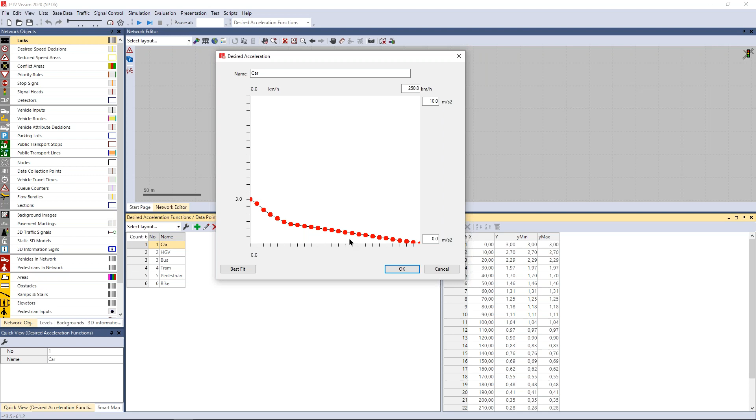Of course, you can have some spread there, but a little bit smaller than for conventional vehicles, or any which fit your assumptions. And you can see there are many other functions you can have a look at.

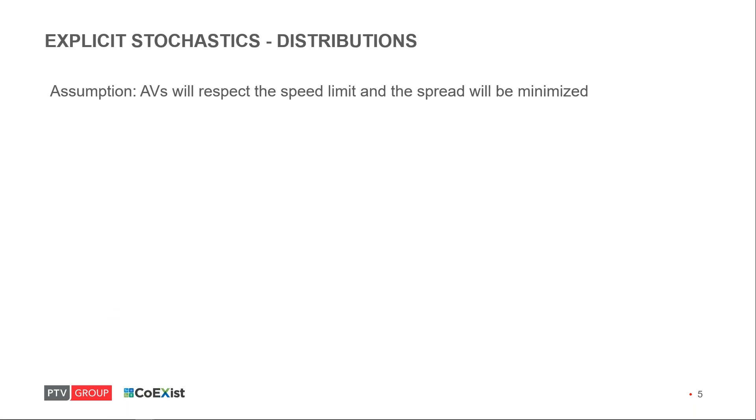So the second typical place to set explicit stochastic in Vissim are distributions, and the most important distributions are the desired speed and the time. That has an impact on headways with the Wiedemann 99 model, for example. And for example, for desired speed, we can assume that the speed spread of AVs will be much smaller and they will obey the speed limits, which many human drivers do not do, as we know.

So again, if this is the original speed distribution, then your assumptions can say that automated vehicles will follow the rules and they will drive 100 kilometers on a road where the limit is 100, with much less spread.

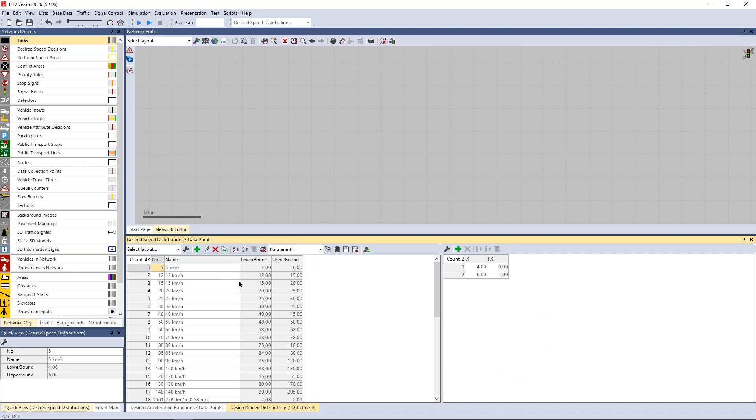So if I switch back to Vissim and I go to base data, distributions, desired speed. So if you have this default distribution for speed 130 and you want to create your own, then you can just duplicate this one, then open it, and you can put here a new range which fits your assumptions, and you can also add your points there if needed.

So that was about explicit stochastic, about functions and distributions. You can access them in Vissim, you can duplicate and change them, and use your own assumptions. Now let's have a look at the new features.

At first, a few words about the role of driving logic. It's the logic in the form of algorithms which decide how the autonomous vehicle will behave. And this has an implication on following behavior, lane change behavior, lateral behavior, reaction to signals, and conflict resolution. And for each of these parts in Vissim, you have a set of parameters you can set.

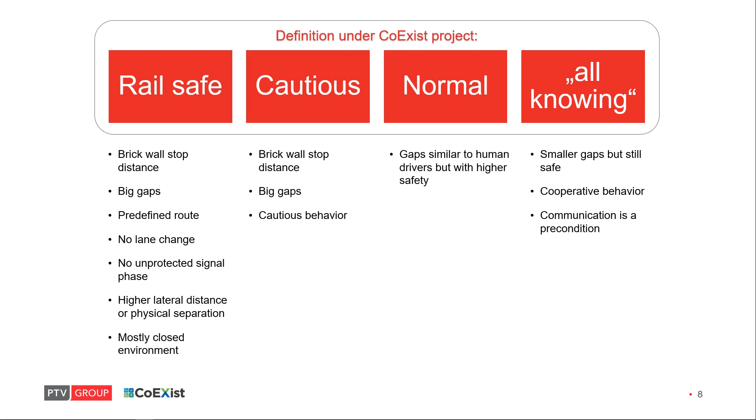Then there is cautious, which follows the brick wall stop distance concept. We expect bigger gaps than by human drivers, which means very cautious behavior. Then the normal one, where the behavior should be similar to human behavior in terms of gaps and distances to other vehicles when following, when interacting. And all-knowing, where we can assume also smaller gaps, but still high safety and cooperative behavior, and where communication is a precondition.

The first feature, enforce absolute braking distance. The idea behind this: the vehicle can stop safely anytime without a crash, even if the leading vehicle stops instantly, which means turns into a brick wall. And this has implications for following behavior. So the vehicle keeps a distance which is the braking distance needed at the speed plus standstill distance, but it also has implications on lane change behavior,

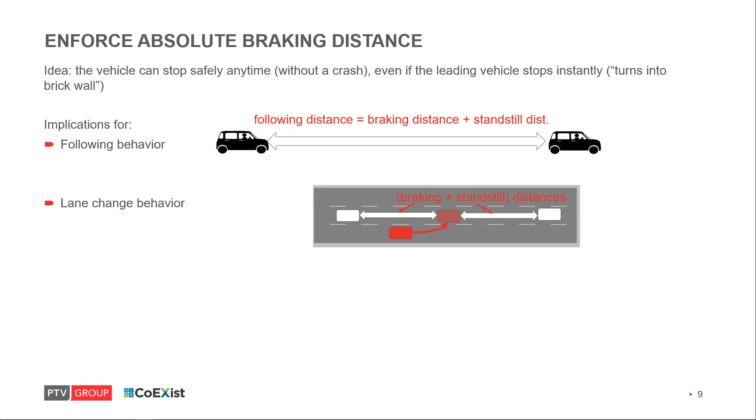where if a vehicle wants to perform a lane change into a lane where other vehicles are present, then the distances in front of the vehicle and behind the vehicle need to be big enough, and that reflects the braking distance and standstill distance. And it also has an impact on gap acceptance at intersections, but only for conflict areas. It doesn't work with priority rules. And here, the rear gap equals the time to brake to a full stop 1 meter in front of the conflict area.

I will switch to Vissim now. And please, if you didn't start Vissim until now, please do it now. Start Vissim.

And in the directory EABD examples, so let's have a look at the examples. There is a directory EABD examples, and from this directory, I will load the EABD link example into Vissim. Then start a simulation.

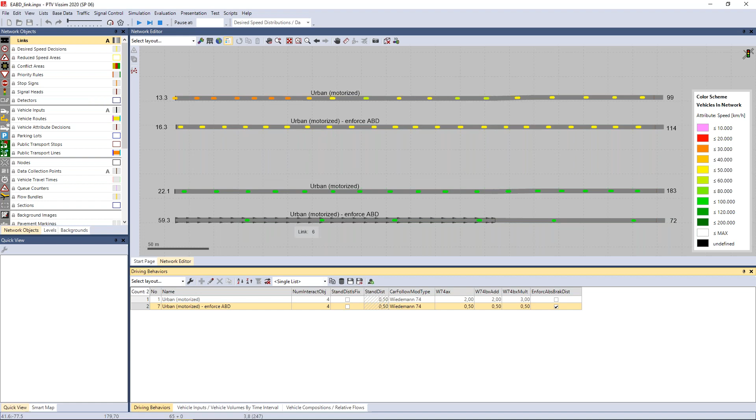But here the difference to the first one is not so big because the speed is quite low. The desired speed is just 50 kilometers. But if you have a higher desired speed in the network, then you can see that the distances are much bigger. That's because the vehicle needs much more space to brake to come to a full stop in any situation. So in a theoretical situation, this leading vehicle would turn into a brick wall instantly without its own braking distance.

And this principle, these options here use absolute braking distance. This is used by the first two driving behaviors or driving logics we worked with in the CoEXist project, Rail Safe and Cautious.

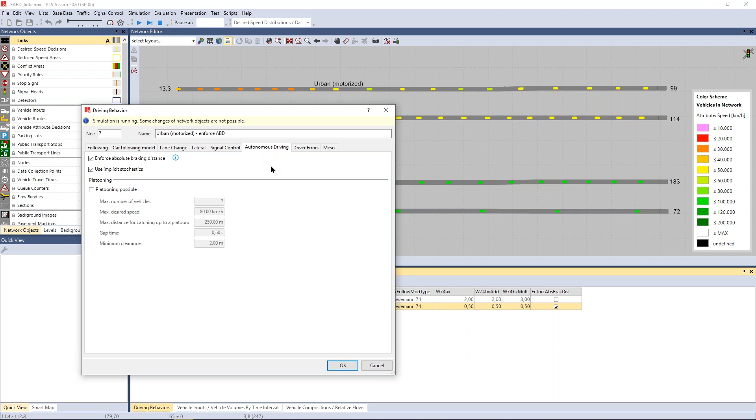Okay, then let's have a look at the second example, which you can find in the same directory, EABD examples. And it's EABD intersection. I need to stop the simulation first. And then I can load this one. I start a simulation.

And you can see two pairs of networks. On the left side, that is a low speed environment. And on the right side, it's a high speed environment. And you have one major flow and one minor flow with a conflict area here, which means the vehicles in the minor flow need to wait for a gap in the major flow to cross the intersection.

It's the same situation in each network here, but here the default driving behavior is used, urban, but here a modified driving behavior is used where enforce absolute braking distance is activated. Yeah, the same here. This is the default one, and this is with enforce braking distance activated. And what is the impact of this?

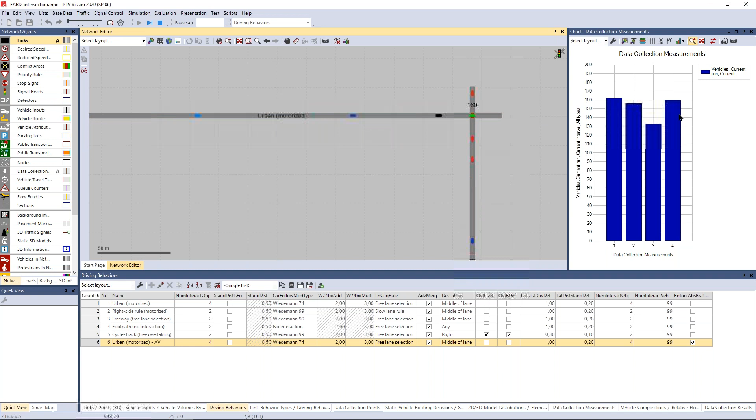And you can see that when you activate enforce absolute braking distance here, then you will get a lower number of vehicles going through the intersection. The number is collected here, at collection point number 3, which is bar number 3 in the diagram. And the number here, 160, is connected with collection point number 4, which is number 4 here in the diagram. So this is number 3, this is number 4, this is number 2, and this is number 1.

So you can see it has an impact on the capacity of this simple intersection, because if you activate enforce absolute braking distance in that case, and especially in a high-speed environment, the vehicles need bigger gaps in the major flow to cross the intersection.

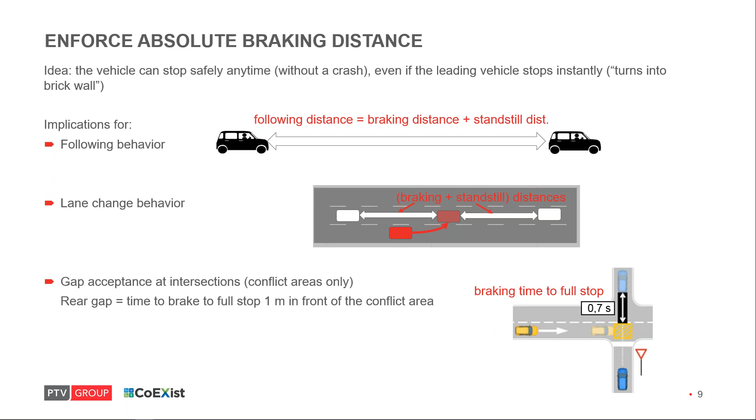Okay, let's go back to the presentation. The next feature is number of interaction vehicles. This was available in Vissim 10. In Vissim 10, we call that number of observed vehicles.

Some network objects are modeled as vehicles in Vissim, and vehicles treat these network objects as a preceding vehicle, and that is for red signal heads, reduced speed areas, and priority rules. And vehicles also treat some network objects as preceding vehicle if they have to stop. That applies for stop signs, public transport stops, and parking lots.

And since Vissim 11, instead of one parameter number of observed vehicles, we have 2 of them. We have number of interaction objects and number of interaction vehicles. Why? The idea behind it is that automated vehicle can see the signals ahead, but only 1 or 2 vehicles in front of itself, because the sensor cannot see through the leading vehicles.

And if you have the settings in Vissim that the number of objects is smaller than the number of vehicles, that will be the same behavior as in Vissim 10. But if the number of objects equals or is higher than the number of vehicles, then you will get some new limited sight and interaction behavior. So you can distinguish between interaction vehicles and objects with these 2 parameters now.

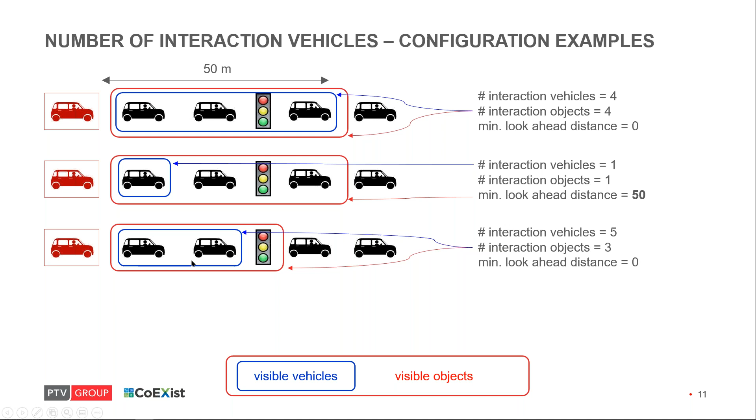And other settings: interaction vehicles 5, objects 3, and minimum look ahead is 0. So 3 objects are visible, and all vehicles up to 5 within this range can be seen. So in this case, these 2 vehicles. Another situation: number of interaction objects 5, interaction vehicles 3. So the first 3 vehicles within interaction objects are visible, and all maximum 5 interaction objects are visible. So this signal head is visible, so the vehicle can react on it.

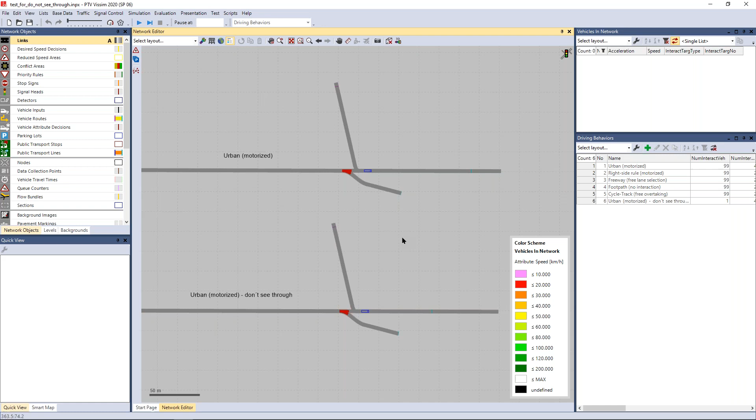Okay, I will switch to Vissim now to show some examples. I go to the directory number of interaction vehicles, and there is an example test for do not see through. So load this example into Vissim. And here you can see 2 identical networks, but with different driving behavior in use.

And when I start the simulation with F5, and then I pause the simulation with F6 to see how it is at the beginning of the simulation. There are 2 vehicles coming in to the network here, and 1 vehicle coming from the north, and this 1 vehicle will park here in this parking lot, and that will simulate a situation when a vehicle is broken, for example, and cannot continue, or there's a crash.

So when I continue with the simulation step by step by pressing F6, I see that this vehicle will park here, and the same situation here in the second network. And now these 2 vehicles will continue on their routes, where this first vehicle, number 3, will turn right, and the second vehicle, 5, will continue straight.

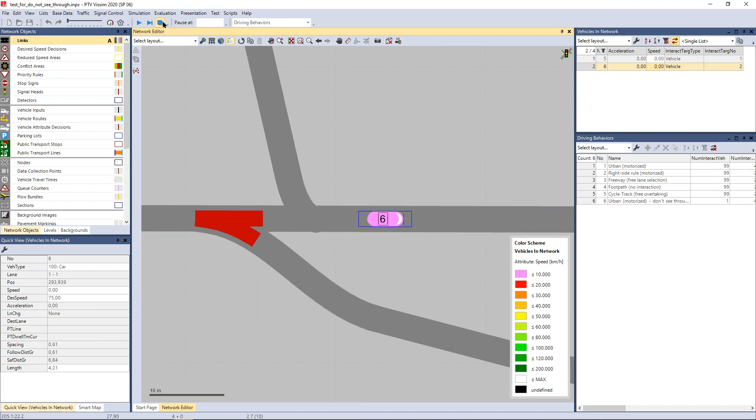So I will continue step by step with this simulation. So number 3 will turn right, and number 5 is approaching number 1 and can stop safely here. When I have a look here down, I have a different picture. There is a crash. So I will stop the simulation and

simulate again, step by step, by pressing F6, and have a look on the vehicle number 6 and on the interaction target number. It's 4. And now I press F6 to go one time step further, and it's still number 4 here as interaction objects. One more, one more, and I will press F6 until I get a different interaction target number here. One more, one more,

one more. Now this is the moment that this vehicle number 6 can see vehicle number 2, is interacting with vehicle number 2, but the distance to this vehicle is too small to stop safely with the speed of this vehicle, what we can see. So there is a crash because the vehicle couldn't see the standing vehicle on time.

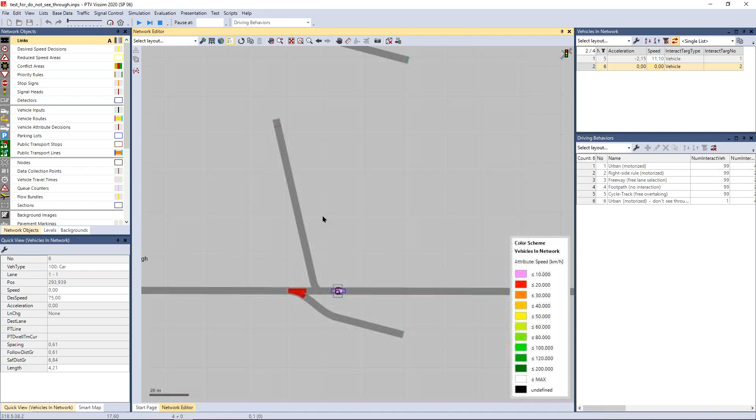So this is a demonstration of what you can achieve with the limitation of how many vehicles can be seen, or with how many vehicles your automated vehicle can interact with. And on the slides, I was talking also about minimum look ahead distance. So I will say a few words to that one. But have a look on the settings in driving behavior at first.

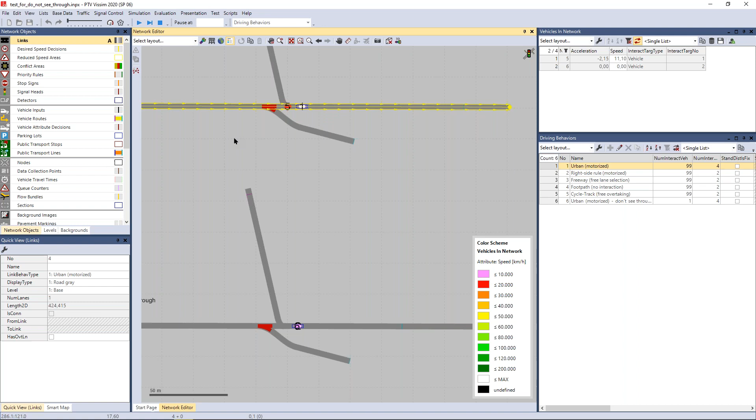So on this link, link number 1, link behavior type 6, it is using driving behavior number 6 here, and the number of interaction vehicles is set to 1. Whereas here on urban, this link is using link behavior type 1, and link behavior type 1 is using driving behavior number 1, where number of interaction objects is 4 and number of interaction vehicles is 99. So all vehicles within the number of objects can be visible. So the two vehicles in front can be seen, and the vehicle can stop safely.

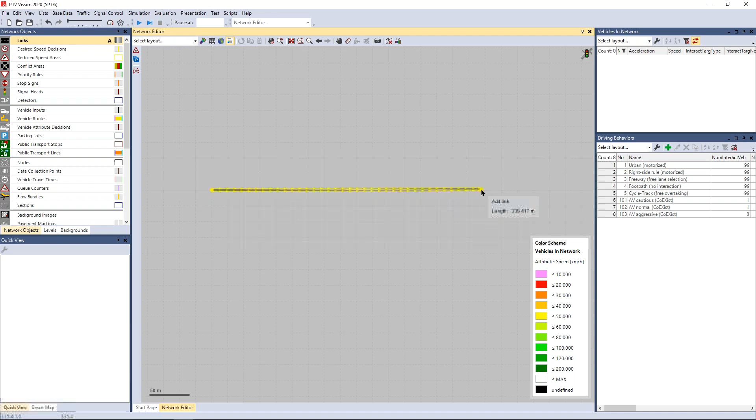We can do one more example. So I will stop the simulation, and now I will create a new model from scratch. And please do all these steps with me. It will be not complicated, just a very simple network with one link. And we will create a situation where we have non-lane based traffic. So we have one wide road. Let's say the width is 15.

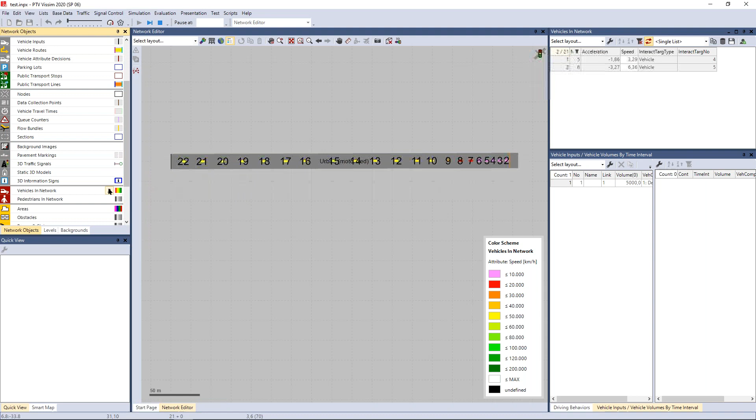And put a vehicle input here on this link, with some high volume. I will put here 5,000. And one more thing, I want to stop the vehicles before they leave the network. So I will place a stop sign here at the end of the link. So I will save the model. I will switch off the labels for vehicles. So this is how it looks like. So we will do some changes.

The driving behavior here, which is used, is urban motorized, or that's the link behavior type. And I need to have a look into the link behavior types list. And this urban number 1 is using driving behavior number 1 urban. So I switch to driving behaviors number 1, and I will open it and do some changes. And on the tab for lateral, I will allow any position, and I will allow overtaking on the same lane from left and from right.

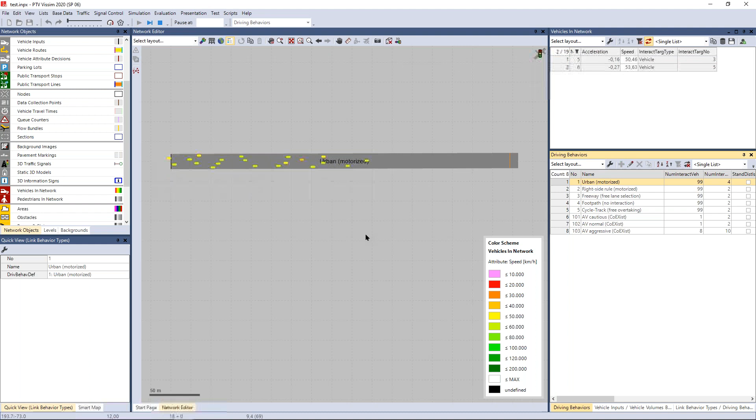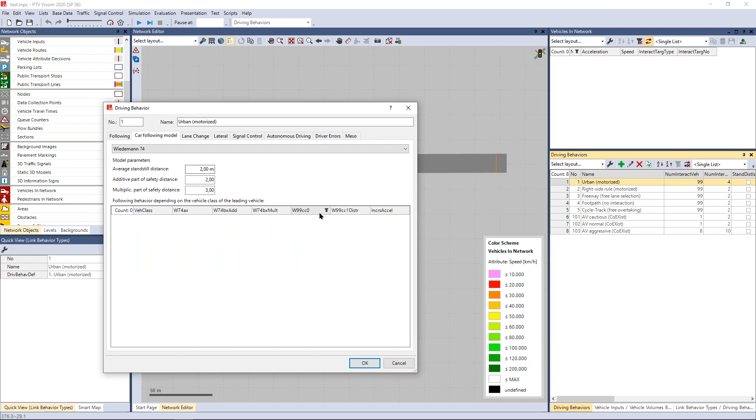So this is how it looks like. It's quite a mess. Just switch to 3D to see it clearly. So the vehicles are crashing into other vehicles. Why is that? Let's have a look into the driving behavior, urban, which is used. And let's have a look on the tab following. So the number of interaction objects is set to 4.

So only 4 vehicles in front can be seen, but in a situation that there is non-lane based traffic, it can easily happen that there are much more objects in front of you. You need to observe and react on that. It's typical for bicycles, for example, but also for non-lane based traffic. So now I could increase the number of interaction objects to solve the issue, or I can say that there is some minimum look ahead distance.

I will say 30 meters, which means that all objects which are visible, which are within these 30 meters, can be seen, and the vehicles should react accordingly. So I don't have crashes anymore, because the vehicles can react to all objects they should react on in the front, and there are no crashes anymore.

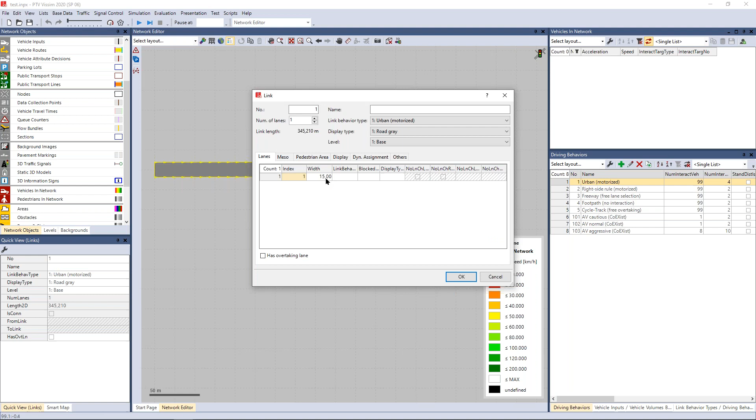So a quick recap of what I did. I created one link with one lane, but I set the width to 15 and inserted here a vehicle input with a high volume, and the driving behavior used on this link, I modified it. So when you double click on that driving behavior number 1, it opens the dialog for driving behavior.

And here you have the tab lateral, where I changed the desired position at free flow to any. And I activated here overtaking on same lane from left and from right. And you also can specify the lateral distances which should be kept. And after changing to these settings, I got a lot of crashes there, and I resolved that by setting the minimum look ahead distance to 30 meters.

So all objects within this distance can be seen and the vehicle can react accordingly. So the vehicles can see up to 99 vehicles up front.

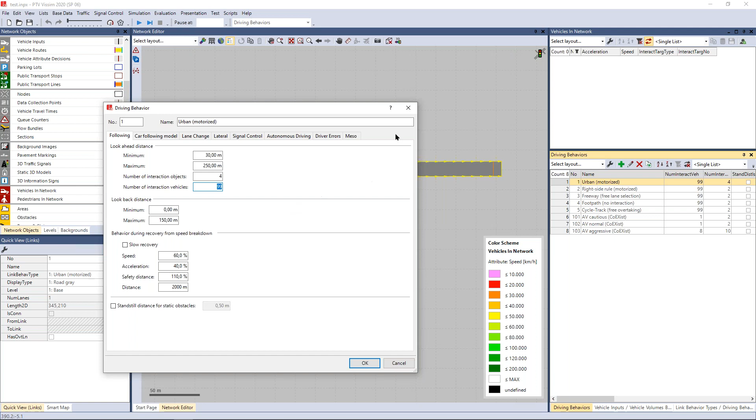And to stop the flow, I insert a stop sign here at the end of the link. So each vehicle needs to stop and then it can continue.

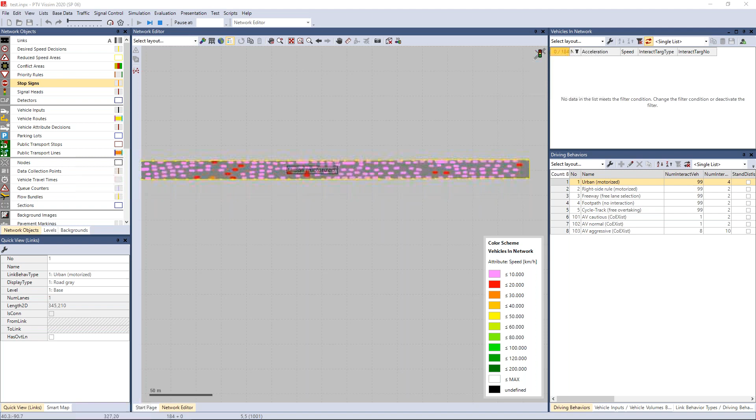What I did in the last example in Vissim, I set the minimum look ahead distance to a non-zero value, to 30 meters in my case, which means that all vehicles within this distance, up to the number of interaction vehicles, which was 99 in my case, can be seen and the vehicle can react on it accordingly.

And after our workshop, I will provide you also this presentation so you can have a look afterwards again. I see there are some other questions. Maybe I will come to those questions later after my presentation.

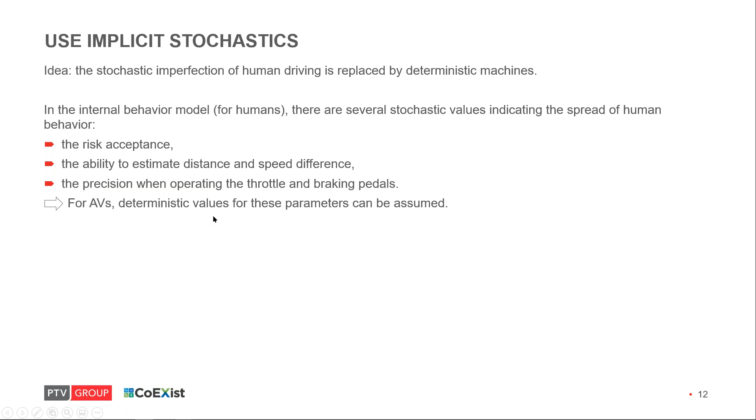So the next one, use implicit stochastic. The idea behind it is that the stochastic imperfection of human driving is replaced by deterministic machines. And in the internal behavior model, which was developed for humans, there are several stochastic values indicating the spread of human behavior: the risk acceptance, the ability to estimate distance and speed difference, the precision when operating the throttle and braking pedals, and for AVs, deterministic values for these parameters can be assumed.

So if the attribute use implicit stochastic is false, a deterministic average value is used instead of such a stochastically distributed value whenever the distribution cannot be set by the Vissim user. And this option affects desired safety distance, desired acceleration, desired deceleration, and decision points, so when to start braking and accelerating. And for these three, the user may also specify distribution functions, but these are not adjusted automatically. Only an implicit term is suppressed.

So I will switch to Vissim again and let's have a look on another example. There is the directory use implicit stochastic, and there is one example inside. So open this example.

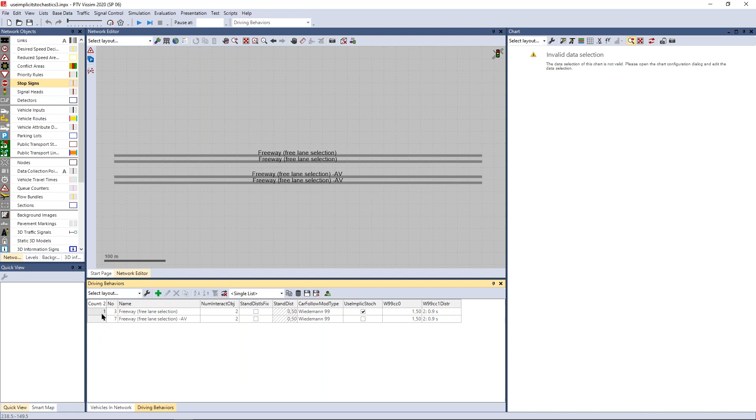Okay, in this example, I'm using two driving behaviors here, the default one and a modified one. And in this one, which is modified, on the tab for automated driving, the option use implicit stochastic is deactivated, because by default this option is activated. And I will start the simulation now and stop, and will explain what this is about.

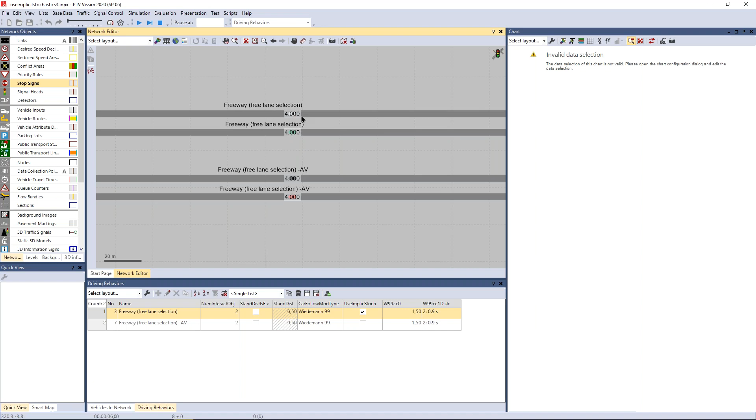I have here 4 links. Here, the default driving behavior is used for the first 2, and for the second pair of links, the modified driving behavior is used. I have here vehicles in the front with the same speed of 10 kilometers per hour, so they are at exactly the same position. And I have other vehicles which drive with higher speed and will approach these vehicles here.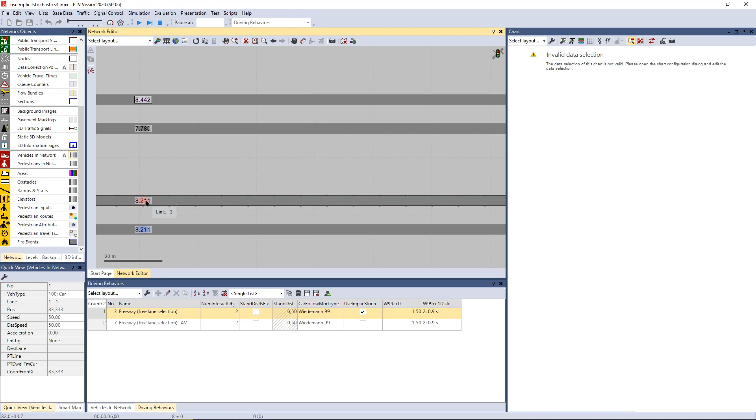And the labels for vehicles here are showing me the safety distance gross value. And you can see that here these 2 vehicles have identical speed. They have been inserted at the same moment in the network, but they have different values here. And these 2 vehicles here have identical values.

And when I continue simulating this, the vehicles will approach the vehicles in front, and now they follow the leading vehicle. And you can see that this value and this value differ. They are changing, there is some oscillation, but they are different.

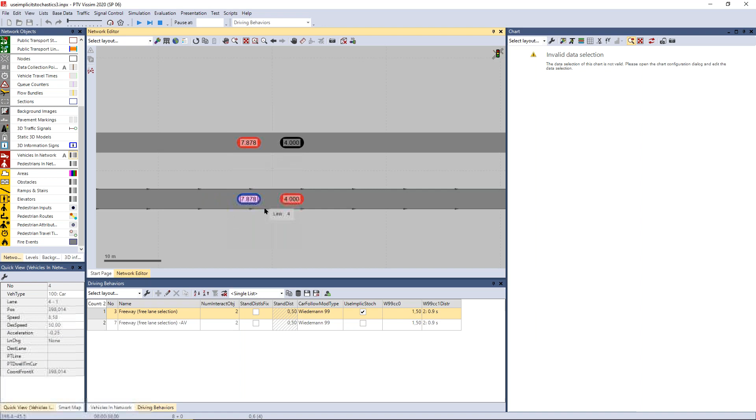And here, for the second pair of links where the driving behavior has been modified, you can see that the value is the same. It's always changing, but it's always the same. And that's because the implicit stochastic is switched off here.

You can see it also in the chart, but you probably need to select the layout here to show the values. And when you continue the simulation, you see how the values are changing, and this one and this one are identical, and this one and this one are not identical. Okay, I go back to the presentation.

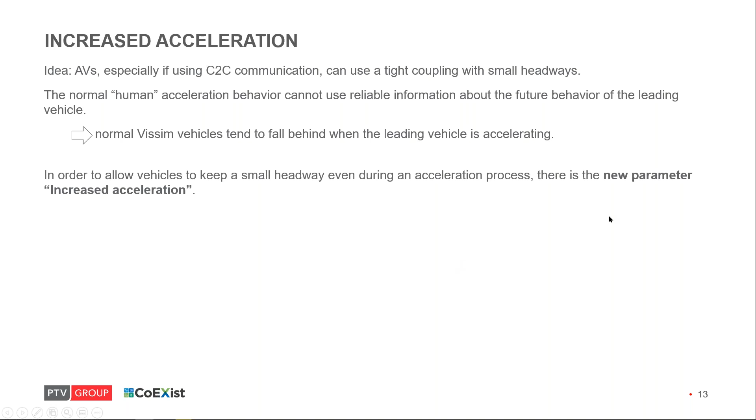The next one we implemented is increased acceleration. And the idea here is AVs, especially if using car-to-car communication, can use a tight coupling with small headways. And the normal human acceleration behavior cannot use reliable information about the future behavior of the leading vehicle. So normal Vissim vehicles tend to fall behind when the leading vehicle is accelerating. And in order to allow vehicles to keep small headways, even during the acceleration process, there is a new parameter, increased acceleration.

So in the list of driving behaviors or in the dialog, you can set this value, increased acceleration, which defines a percentage of normal acceleration to be used when the leading vehicle is accelerating. The vehicle cannot exceed its maximum acceleration. That's a limitation. But it can exceed its desired acceleration.

So when I switch back to Vissim to have a look on this, when I open some driving behavior, then on the tab for car following model, here in this field, I need to stop the simulation.

You can put some value which is higher than 100, which means increased acceleration. So a vehicle which is using this driving behavior following a vehicle of this class can use this increased acceleration.

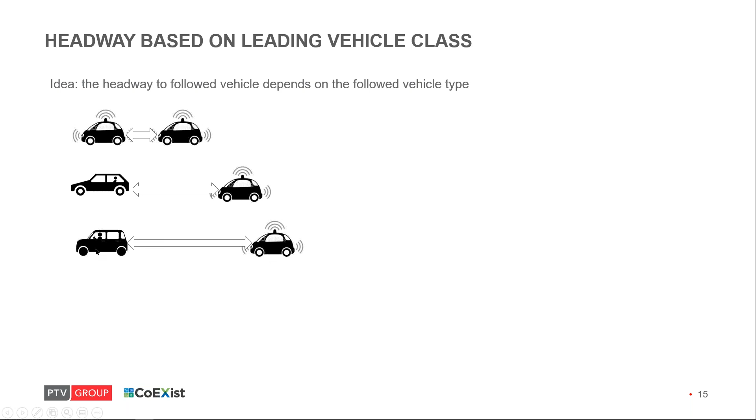Headway based on leading vehicle class. What is this about? The idea here is that the headway to the followed vehicle depends on the followed vehicle type or vehicle class. So you can have very small distance between automated vehicles which are connected, a little bit higher between automated vehicles without connection, and even higher distance when an automated vehicle is following conventional vehicles with a human driver.

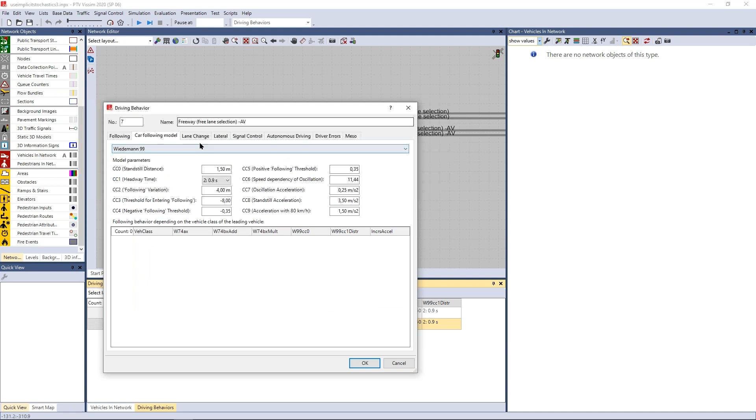And you can set this in the same dialog I showed you where I set the increased acceleration and also in the list of driving behaviors. So let me switch to Vissim and I will open some driving behavior just to show you where you can set these values. For Wiedemann 99, you can set CC0 and CC1 and increased acceleration based on the class of the leading vehicle. And you can insert here as many lines as you need and set the appropriate value here.

And here maybe we could do a simple exercise. So I will create a new model. I will also open the default layout. So I clicked on File. At first I clicked on New File, and then I chose from File, Open Default Layout. Maybe you will see this one, and you need to switch to Network Editor, but my default network always shows the Network Editor because I saved this setting, like you can see right now, as my default with save as default.

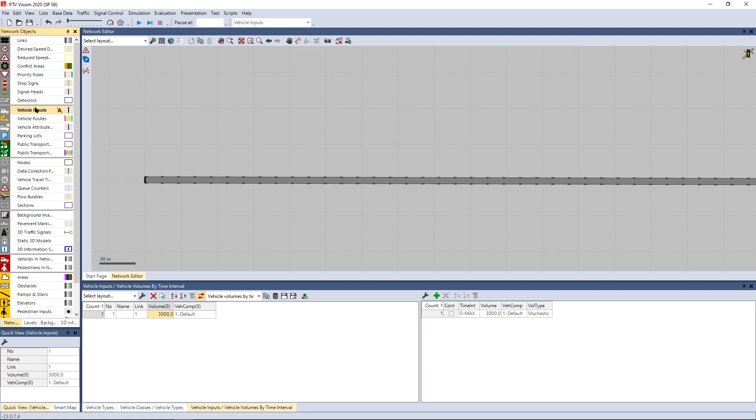And here, let's say I want to have 50% conventional cars and 50% my AVs there. So instead of HGVs, I will choose here car AV. And here relative flow I will set to 1 for both of them, so I will have 50% cars and 50% AVs. So when I try to run the simulation, at first I need to save the network, and then with the plus or minus button you can speed up or slow down your simulation.

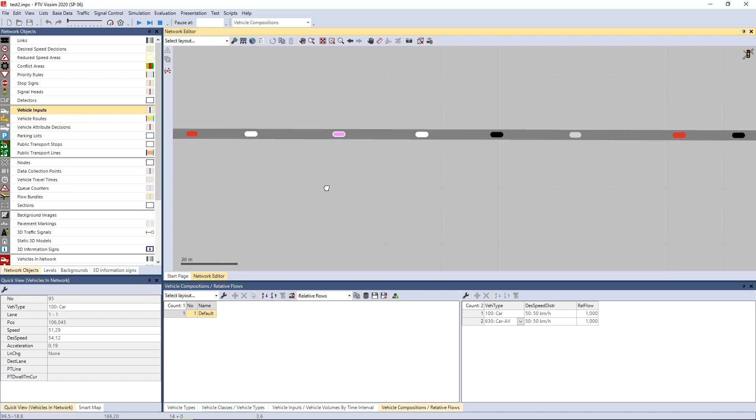So when I pause the simulation and I select one vehicle here, I can check the vehicle type in the quick view window. And this is car AV. This is car AV. This is car. And maybe I could use a color scheme just to distinguish between the vehicles easily by color.

So I can do that in edit graphic parameters for vehicles in network. And in drawing, I change the drawing mode from color by distribution to color by scheme. And color scheme configuration, the next line here, you can choose an attribute which will be used for the color scheme.

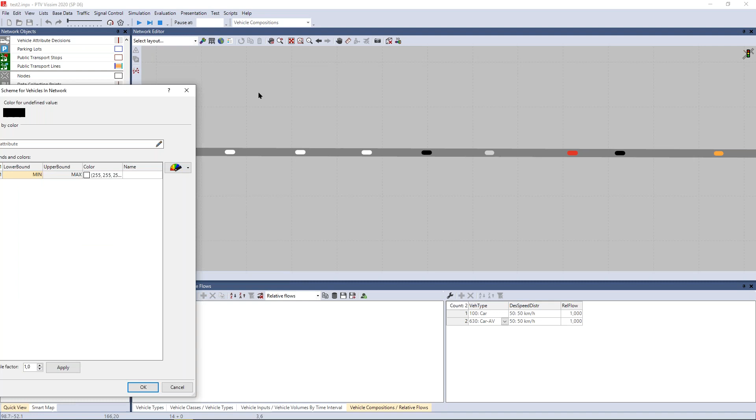And we could use the vehicle class number or the vehicle type number, because we have one-to-one settings for vehicle types and classes. So I will scroll to vehicle type here. And then I should find number, vehicle type number. And then from the context menu, I will add one more line. And if I remember correctly, yeah, I can see it here. My vehicle type car has number 100.

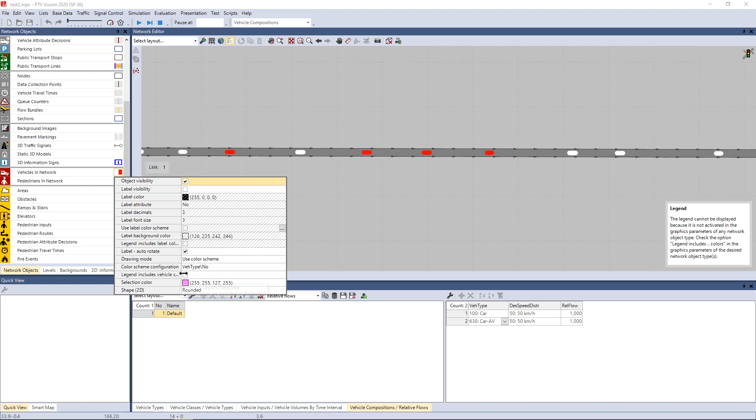And I keep the white color here. And for vehicles with vehicle type number more than 100, I will choose red color. So this is a car, and this is an AV. So now I will switch on also the legend here, legend on/off button. And I need to add the vehicle color into the legend, into graphic settings. So I have a car and AV. Like this.

So a quick recap. I created a new vehicle type by duplicating the existing one, and I renamed it. Then I created a new vehicle class by duplicating an existing one and renaming it. And I changed the settings, which types belong to this vehicle class. And then I set the colors for vehicles by editing graphic parameters for vehicles in the network. For drawing mode, I choose use color scheme.

And on the next line, there is a color scheme configuration. Here I choose an attribute, which is the vehicle type number. You can find the vehicle type also here directly, but this will be in a different form. This is not just a number, but 100, for example, and the name of the vehicle type. And for the classification for the color scheme, you need values only.

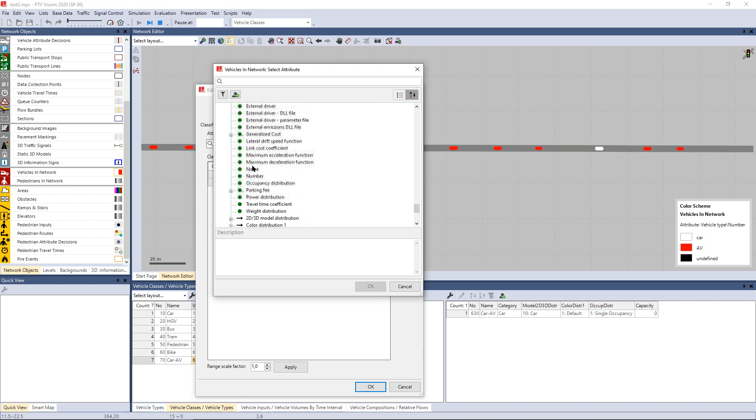So I scrolled down to the relation to vehicle type, and under vehicle type you can find number, and this is only the vehicle type number, not the string with the value and the name. Then from the context menu, I added one more line, and I set the upper bound to 100 because I know that my vehicle type number for cars is 100, and for AVs I have a higher number. So with these settings you can distinguish between cars, you can see here in the quick view window, and the red ones are AVs.

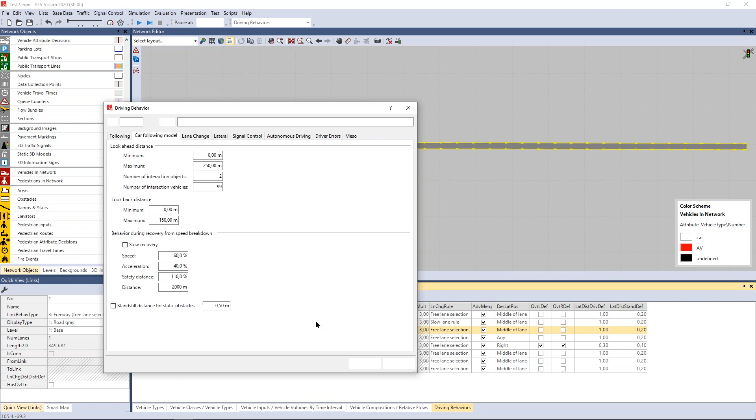Okay, and now let's say that this link uses link behavior type number 3, which is a freeway, and I open from base data and driving behaviors the list of driving behaviors. And I open number 3, freeway. And on the tab car following model, I want to change some parameters based on the leading vehicle class.

But I forgot one more thing. My conventional vehicles will use a different driving behavior than my AVs. So if my conventional vehicles should use this number 3, then I will duplicate this, and my AVs should use this one I created, number 104.

And I need to go to base data and link behavior types, because here I can say what happens on a link which is using link behavior type number 3. By default, vehicles are using driving behavior number 3, but I can define an exception, a specific driving behavior for a specific vehicle class in the coupled list for driving behaviors. From the context menu, I choose add, and for my class car AV, I say this should use my AV behavior. So all other vehicles will use number 3, freeway, but this specific class will use driving behavior number 104.

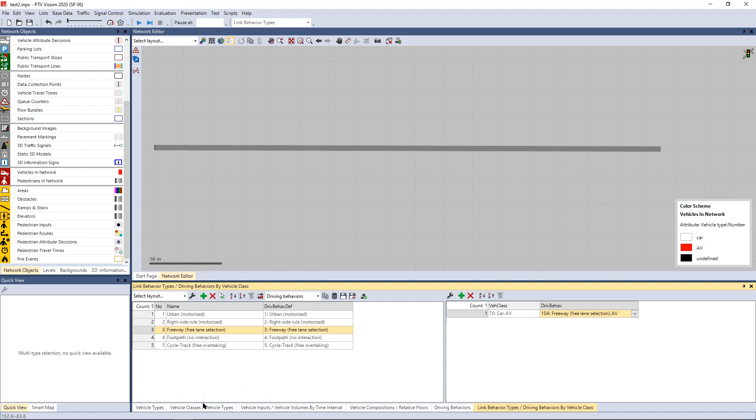So this is the setting for link behavior types. And I go back to driving behaviors, and I open the new driving behavior which should be used by my AVs. And here I can add a line, and I say that if this AV is following another AV, in that case, I want to reduce the CC1 distribution and also CC0. So I will set CC0 to 1, and let's say I want to have CC1 0.3.

That option is not here, so I need to create it under base data, distributions, and time. I can take the first one and duplicate it, change the name, and change the mean value to 0.3. When I have this, I can go back to driving behaviors, and I will choose that time distribution here.

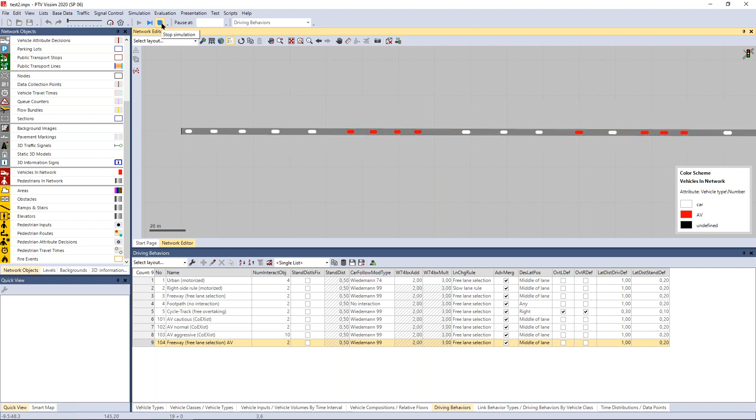So quick recapitulation of my last steps I did. At first, I changed the link behavior type for the link to number 3 freeway. Then I opened the list for link behavior types, and I add in the driving behaviors for my AV vehicle class, I assign driving behavior number 104 in my case, which should be used exclusively by this vehicle class on each link which is using the link behavior type number 3.

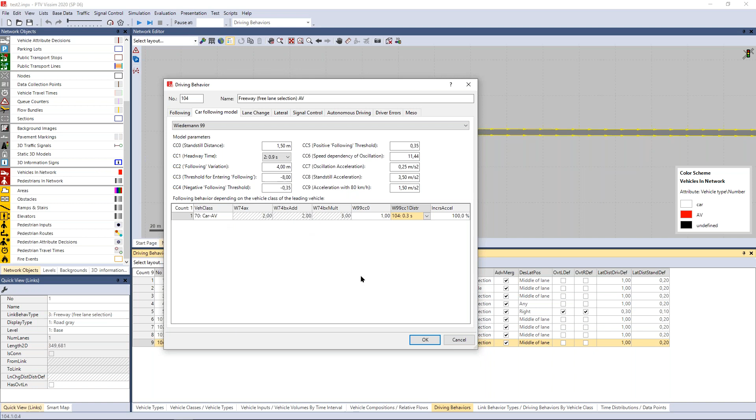And then in driving behavior list, I set for the driving behavior used by my AV different CC0 and different CC1 when such vehicle class is followed. So this is the way you can do it.

I see questions in a chat window. Can the driving logic of CoEXist be applicable for simulation on motorways? Yes, of course. You can use Wiedemann 74 and Wiedemann 99, and actually these 3 driving behaviors. Oops. Let me correct this. These new 3 driving behaviors, which are available in Vissim 2020, always when you create a new model,

these are based on Wiedemann 99, which are suitable for motorways, and you have here much more parameters to set. You have much more control of the behavior than with Wiedemann 74, which is usually used for urban environment, but it's not a must. But it's also used for weaving areas, for example, or merging areas. So you can use both of them, and it's applicable for motorways and also for urban environment.

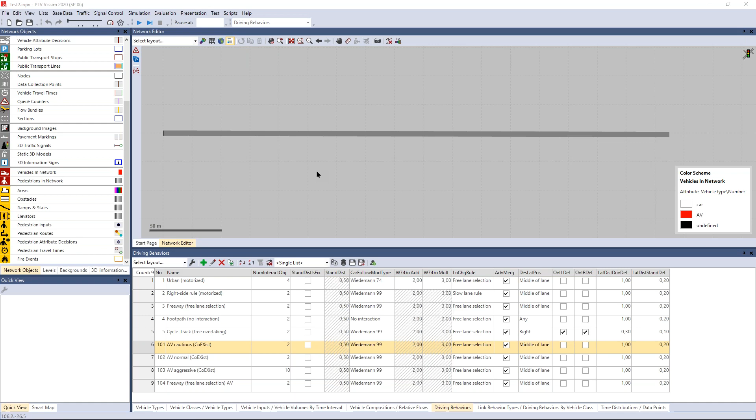Okay. Let me check the time. Okay, I will go to the next one, and that's platooning. This is the newest one we implemented into Vissim, and there is a built-in feature in Vissim you can use to simulate platoons. So you don't need to use scripts for that.

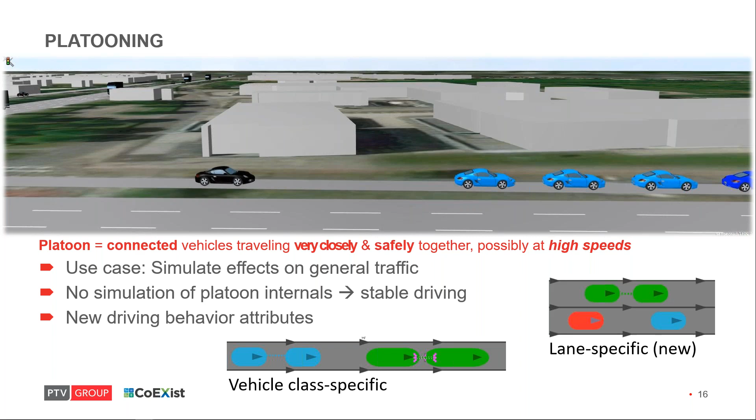And the use case here is to simulate effects on general traffic, and there is no simulation of platoon internals, so there is always stable driving. And there are new driving behavior attributes for platooning. A few more details. It's vehicle class specific, which means that you can have platoons built from cars and platoons built from HGVs separately, or you can have mixed platoons. It's up to you. And it's also lane specific, which means you can activate platooning only for one lane or for selected lanes.

Some details. For joining, a vehicle can join a platoon if the vehicle is driving in the same lane, and if the speed of this vehicle is higher than the speed of the platoon, because only in that case the vehicle can approach the platoon. A vehicle will not accelerate over its desired speed only because of catching a platoon. And it's not designed for public transport routes or parking routes, but only for static routes.

The platooning parameters we implemented: you can set the maximum number of vehicles in a platoon. You can set the maximum desired speed for the platoon. The platoon drives always with the maximum desired speed of the platoon or the desired speed of the platoon leader. If the desired speed of the platoon leader is smaller than the maximum desired speed for platoon, then the platoon drives with that smaller value.

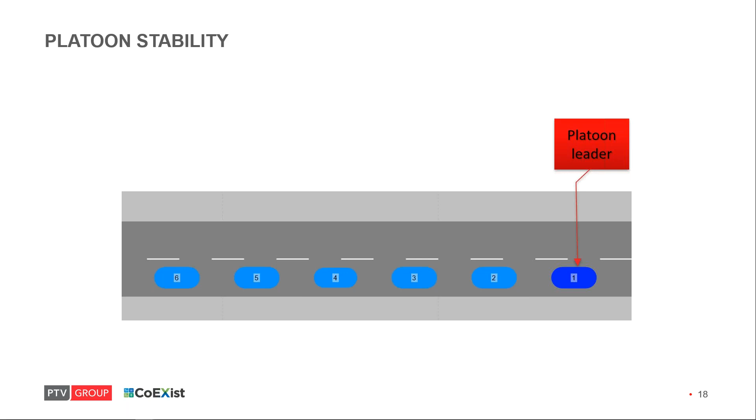How do we deal with platoon stability? Each platoon has a platoon leader, and there is always a last vehicle in a platoon. And this last vehicle in a platoon proceeds to keep a defined gap time and clearance to the preceding vehicle, and its acceleration is limited to the acceleration of the leader plus or minus 2 meters per second squared.

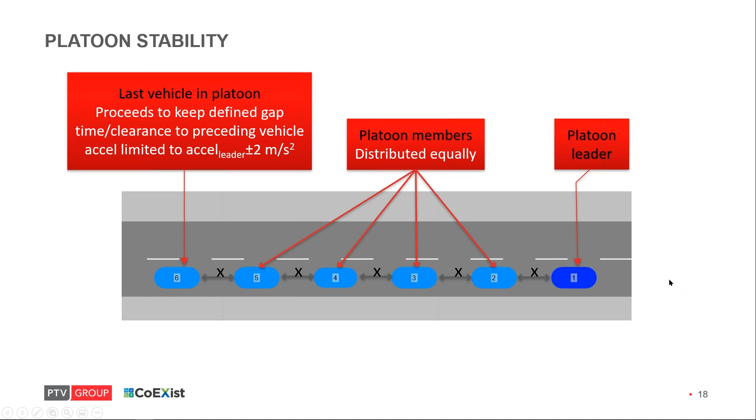And the platoon members, the vehicles in between, are distributed equally. So that's how we deal with platoon stability. It's a simplified model, which means that there is no real simulation of the communication process itself. So the vehicles are not sending any packages, and there is no dealing with latency. So there is an assumption that the platoon is stable, that the vehicles have equipment which allows that.

Platoons can form, for example, in front of a signal. Then if a vehicle needs to leave the platoon, the distance increases, the platoon will split, then the vehicle leaves the platoon. And now we have two platoons in the network, and the second platoon can catch up with the first platoon and can rejoin. So not only can a vehicle join a platoon, but also a platoon can join another platoon.

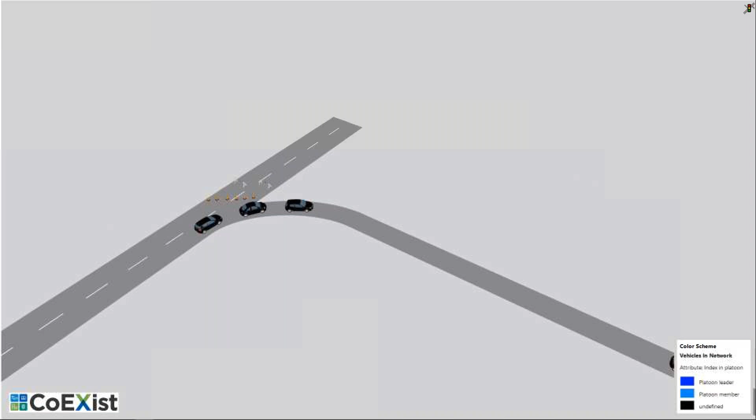And then if there is a signal and not all vehicles can make it, then the platoon splits. And the same if there is an unsignalized intersection. But this time for platooning, you should use priority rules, not conflict areas. Let's have a look at Vissim, and let's open another example from platooning.

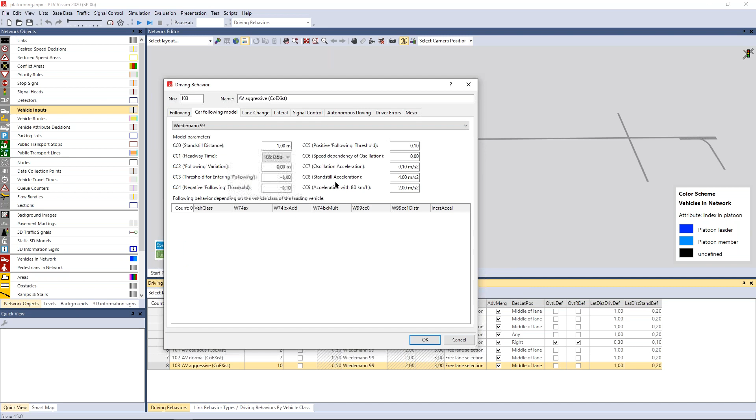I see the question here: how is the leader of the platoon decided? Platooning can be allowed for a specific driving behavior. So I opened the dialog for AV aggressive, and here on the tab autonomous driving, you have the platooning possible option. And if this is activated, it means that a vehicle which uses this driving behavior can form a platoon. And if there is another vehicle approaching this vehicle with the same driving behavior, then they can form a platoon, and the first vehicle will become the leader in the platoon.

So a leader of the platoon can be any vehicle which is using a driving behavior where platooning is possible, if it happens that another vehicle joins this vehicle into a platoon.

So you can run the simulation here. It's the same I showed you in the video. Use plus or minus buttons to speed up or slow down, or use F6 on your keyboard to pause the simulation, and you can press F6 to have step-by-step simulation.

And here you can see that the platoon splits into two platoons because this vehicle has a different route. All other vehicles have the same route, so they could stay in the platoon, but not this one. And then the second platoon can join the first one later, as I showed.

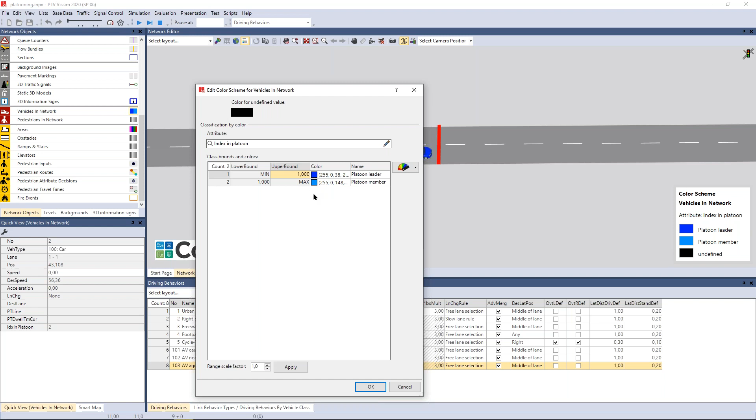So there is another question in the chat: how a conventional car can pierce into a platoon of several HGVs or even passenger cars, how it can communicate with them or send a signal. What is the maximum length of a platoon in this case? So the maximum length of a platoon you can set by number of vehicles here. And the maximum you can enter here, I think it's 99,999. So you can control the length of a platoon by the number of vehicles in the platoon.

And it works this way. I start again the simulation. This is the first vehicle driving in the network, and it's not in a platoon. And there's another vehicle which is approaching this one. And after this vehicle reaches the distance or the gap which is defined for the platooning, then it becomes a platoon member. It creates a platoon with the first one now at this moment, because the gap and the clearance is as defined for platooning.

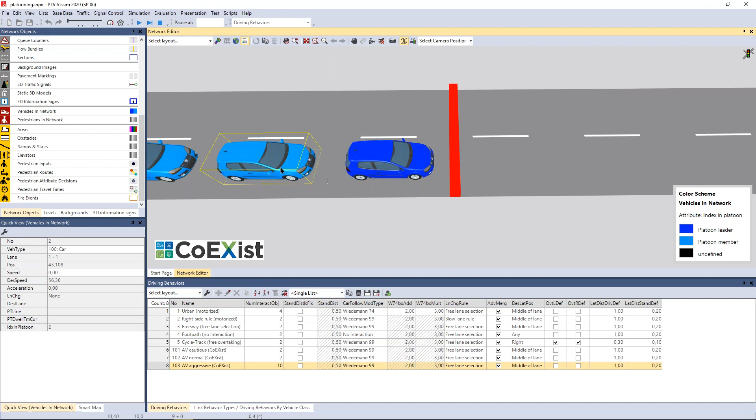This can happen not only when the leader is standing. This can happen also while driving, but for that case, the second vehicle, which is approaching the first one, must always drive a little bit faster than the vehicle in front. It is not sending any message. It just can recognize that there is a vehicle within a range in front which is capable to form a platoon. And when it recognizes that there is such a vehicle, it will approach this vehicle in order to achieve the time gap and the clearance which is defined for platooning. And when that happens, then they form a platoon.

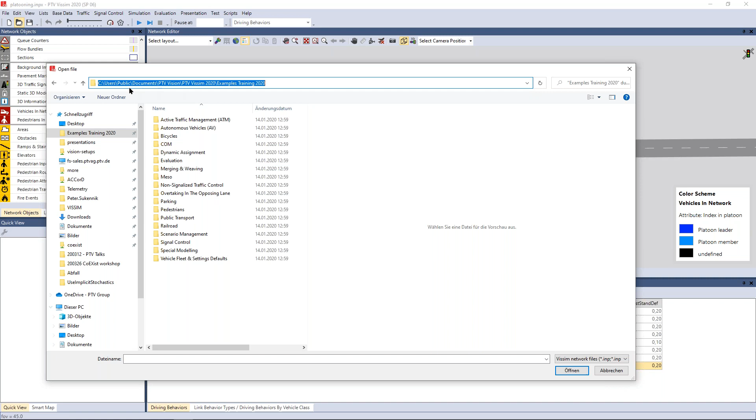Okay, this is the simple example. There is also one more example for platooning. When you open a file and go to the directory with examples training, it's this directory, or more easily, when you go to Help and Examples, then you can choose Open Training Directory. And here under autonomous vehicles, there is platooning built in, and open this one.

I just start a simulation so you can see what happens here in this example. This is the Helmond network with some fixed signal controllers, and platooning is activated for a portion of vehicles in the network. So not all vehicles are platooning capable, but a certain percentage of them. And what you can see here in this example, there is a chart which shows you the number of vehicles in a platoon in total in the whole network. You can see the number of platoons in the network and number of platoons with 2 vehicles, with 3 vehicles, with 4 vehicles, so number of platoons of different size.

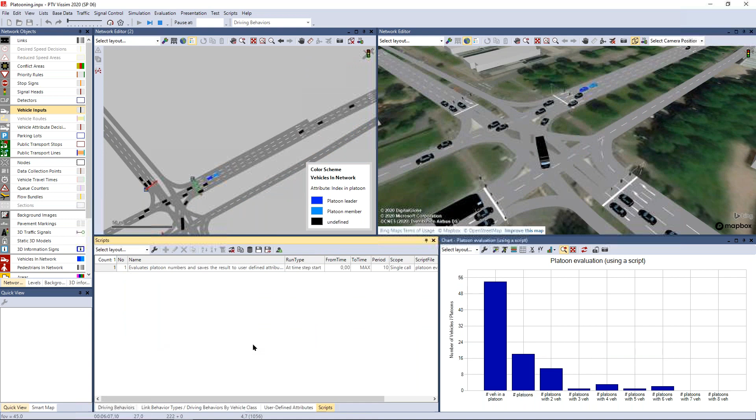And this evaluation is done by a script. So in the list of scripts, you can find one. When you double click, it should open in your text editor if you define a text editor in Windows. And you can see that this script is very simple. Let me explain how it works. This will give you a group of vehicles which are in a platoon, because it filters all vehicles with attribute index in platoon if the value of this attribute is more than 0.

And then this will count how many such vehicles there are. This will count vehicles with index in platoon equals 1. So how many leaders are there, which means how many platoons are there in the network. And then you can check how many platoons there are with index 8 by counting vehicles with index in platoon 8. And if you want to calculate how many platoons of size 7 there are, you need to count the vehicles with index in platoon 7 minus the number of platoons of size 8, and so on. And then you can show these in Vissim, and you can see how the values are changing there.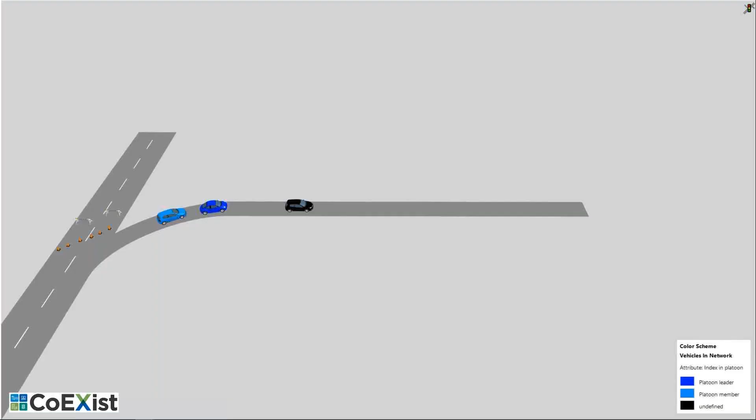So I switch back to my presentation. I already mentioned the attribute index in platoon. There will be also 2 more attributes with Service Pack 7: platoon leader number and platoon size. So this information will be available for each vehicle.

One more feature we implemented, which is not necessarily only an AV feature, allows to model shared-space-like areas where the vehicles in the dynamic potential can be recognized now, and the pedestrians can actively look for gaps between vehicles and use them. So they are not just standing like here on the left side. If there is a vehicle in front, they don't actively look for a gap. They just wait until there is a gap in front of them. But here on the right side, you can see that each pedestrian goes to the nearest gap available and then crosses the street.

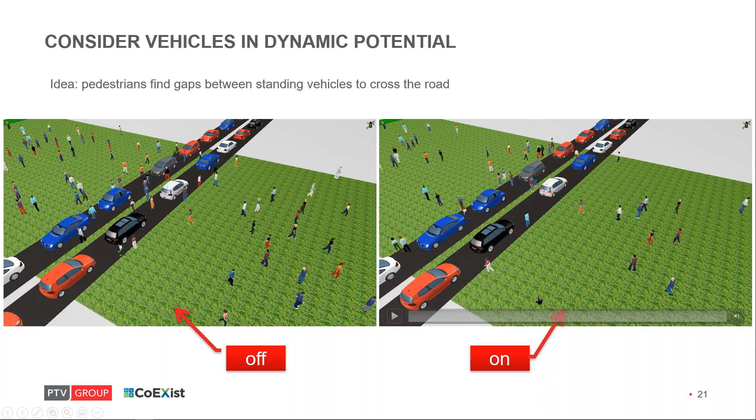For this, there is also an example. You can have a look at it. I will go back to my examples.

Is this one considering vehicles in dynamic potential? So when you open this example in Vissim, then you will see the same scene, and you can have a look at the modeling technique. But I will not do that at this moment.

I would continue. I have just a few slides, so I will be finished with the presentation in a few minutes, and then we can go through your questions.

It's also possible to define 0 passengers for AVs which are driving without a driver and without any passengers in the network. It was not possible in the past, but now it is.

There is also OpenDrive import. OpenDrive is an open file format for logical description of road networks, used often also by car manufacturers or startups and so on. So some companies can do a scan of a real road and provide a file which you can import in Vissim, but the import is restricted to links and connectors.

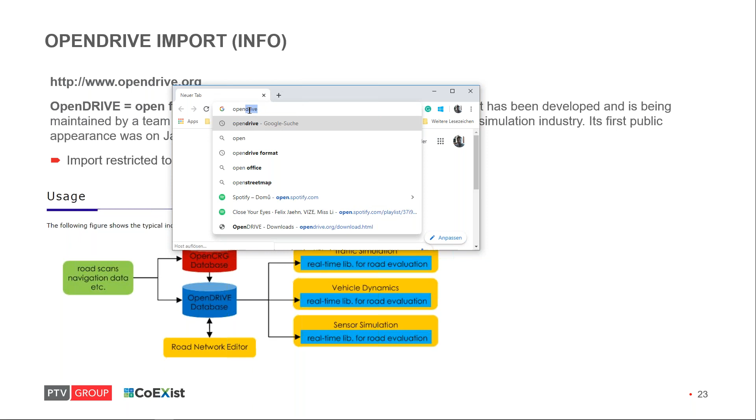And if you would like to try it, then look for OpenDrive, and you can land on OpenDrive Home, and there are some downloads. And there are some example networks, and you can just download them into your Vissim. And in Vissim, you can choose File, Import, OpenDrive, and it creates the network in Vissim.

Okay. Driving behavior parameters. In Vissim, when you create a new file and open the list of driving behaviors, you can always find these 3 new driving behaviors we defined within the CoEXist project for 3 different driving logics: cautious, normal, and aggressive.

And for each of these, we changed the values of the driving behavior parameters for car following, for lane change, for lateral, and for signal control. And you can use this as a starting solution if it fits your assumptions about automated vehicles, or you can

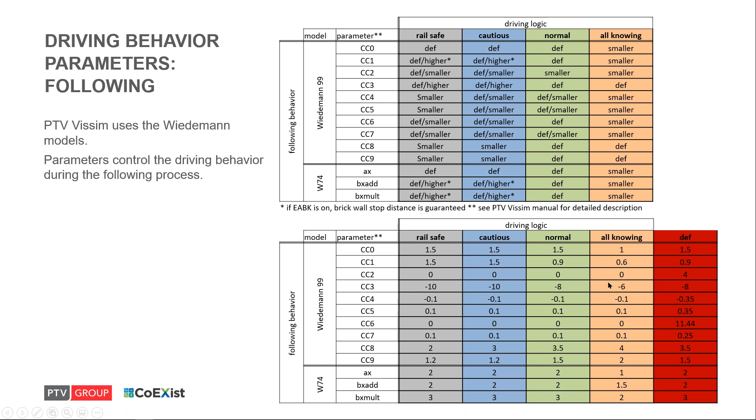change the parameters. So in our CoEXist deliverables, we defined which way we expect the parameters should be changed for each driving logic: whether the value should be the same, smaller, or higher than the default value which is used for conventional vehicles in Vissim. And we did it also for lane change attributes and signal control.

Very few words on cooperation and communication. The first question you should answer as a modeler: what is the impact of communication and cooperation for the vehicles you want to have in your model? So if the impact is that the vehicles can keep much smaller gaps to other vehicles or can accept smaller gaps at intersections and so on, in that case, you can change the driving behavior parameters for your vehicle class.

If it should be something much more complex, like cooperative behavior, in that case, you need to use an interface. So the second question would be: can I replicate the expected behavior with standard PTV Vissim, or do I need an interface? If you get the expected result by changing parameters in Vissim, then fine. If not, then you have the possibility to use an interface.

It could be COM. You can use it to read or set attributes or create objects and manipulate them. This could be used for vehicle-to-vehicle communication or vehicle-to-infrastructure communication. There are already examples under examples training and autonomous vehicles.

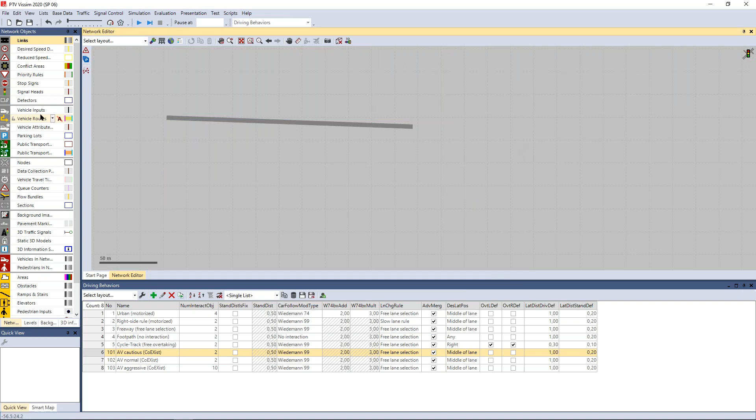And if this can be used for some kind of communication, yeah, for each vehicle in Vissim, let me show you that very quickly. So when you select a vehicle in the simulation, then in the quick view window, you can go to attribute selection, and in this you can look for interact and add these attributes here, and you can see the interaction state of the vehicle and the interaction target number and

the interaction target type. So at the moment, this vehicle is interacting with vehicle number 3, which is this one here, and it's in a following state. And if you would like to use this information somehow for communication or for some actions, then it is possible through COM, because you can read the values of the attributes of every vehicle. So if you would like to do some scripts which would do some actions, then you can access these values.

So let me have a look at another question. Hi, Peter. Yeah, thank you. Thank you for the great demonstration. Would it work if I read some of the questions to you, and then you don't have to go back and forth?

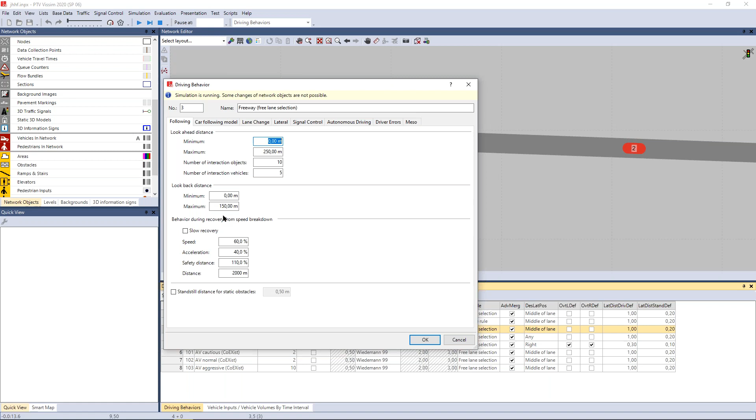Okay, perfect, thank you. Another one with regards to implicit stochastics: when it's not checked, where can the modified deterministic variables then be altered? And in your example, what assumptions did you base your deterministic distributions on? In my example, so let's have a look. That was about implicit stochastics. Yep.

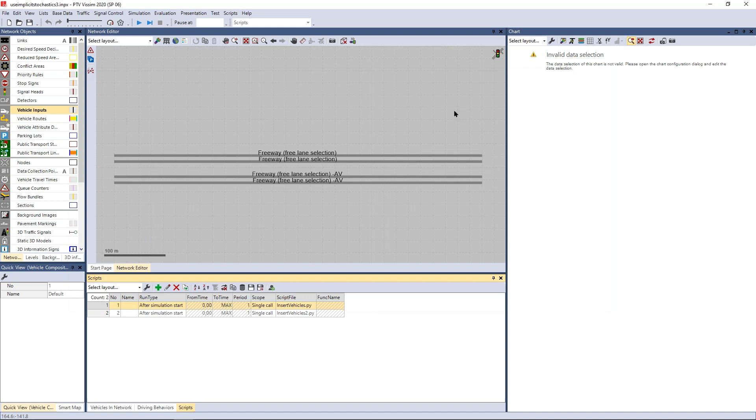So in this example, when you have a look at the vehicle composition that I'm using here, vehicle type 100, I'm not using inputs here because I'm inserting the vehicles by script, and there's a type 100 here, and there's 1, 2, 3, 4 there. Okay, let me check what vehicle type this is. Okay, it's 100 car, and when I have a look at vehicle types, 100 is using number 1 of accelerations and decelerations.

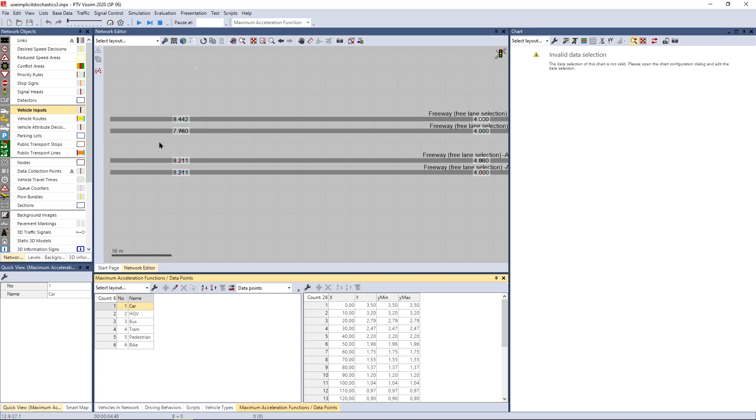And these are reduced to the median. So in all of these, in this example, I reduced to the median to not have the spread of values, because the lines which represent the minimum and the maximum here mean each vehicle will get a value within this range. So I reduced the range so each vehicle can get the median value. And additionally, the implicit stochastics is switched off.

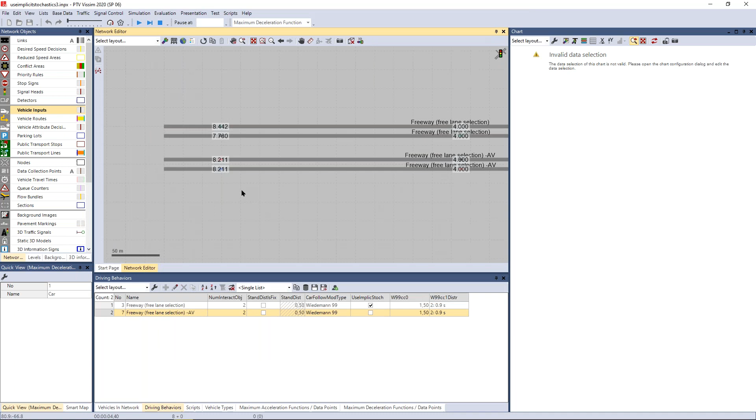Perfect. Yeah, thank you. Let's read another one. With regard to platoons, one of our participants is asking whether, if a conventional car merges into a platoon of several heavy goods vehicles or even passenger cars, there can be a communication with them or a signal sent to them to merge in.

So if the question is if another vehicle can join a platoon from a side, that is not possible. A vehicle can join a platoon only if it's in the front of a platoon or behind a platoon, but in the same lane. In that case, when it is able to approach the platoon, so if its speed is higher than the speed of the platoon, so when it can catch up the platoon, in that case, it can join the platoon.

But if the vehicle is in a neighbor lane, it cannot join the platoon. The vehicles in the platoon will not make space for such a joining vehicle. They will not make space in the middle to allow joining for a third vehicle. And also, no vehicle can change the lane into a platoon. That's not possible. That's blocked. Okay. So in that sense, also no conventional vehicle can go through the platoon if they wanted to change lanes, right?

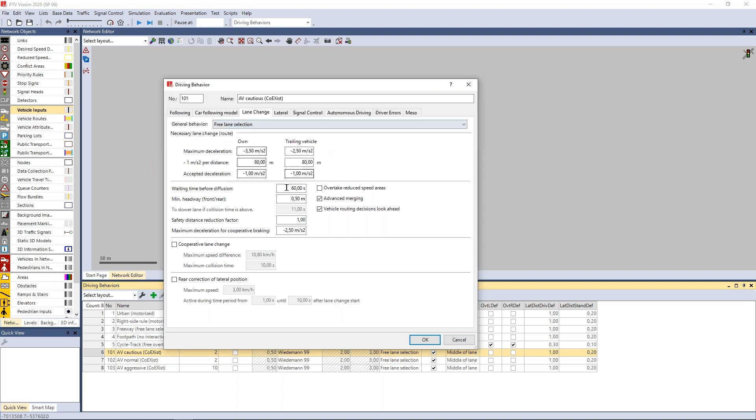And we assume that the cautious vehicles need much higher gap time or much higher distance, because it's much more cautious, and this reflects also the values for lane change. So they are more cautious, less aggressive. And the opposite is for aggressive. For them, we expect a little bit more aggression in lane changing behavior. So we proposed different values, for example, the safety distance reduction factor. So the more advanced AVs can use smaller safety distances for merging, for example, into a lane.

So that was the basic assumption, the aggressivity we expect, which we can define in form of safety distance or following gap or clearance and acceleration and deceleration values. So that was the idea we followed. We would be happy if we had some empirical data about lane change from automated vehicles, but these are simply not available. And we also didn't have algorithms from OEMs, the car manufacturers, if they would be willing to share their algorithms for lane change, if they have them, because that's also a question. Then we could incorporate them into our model, of course.